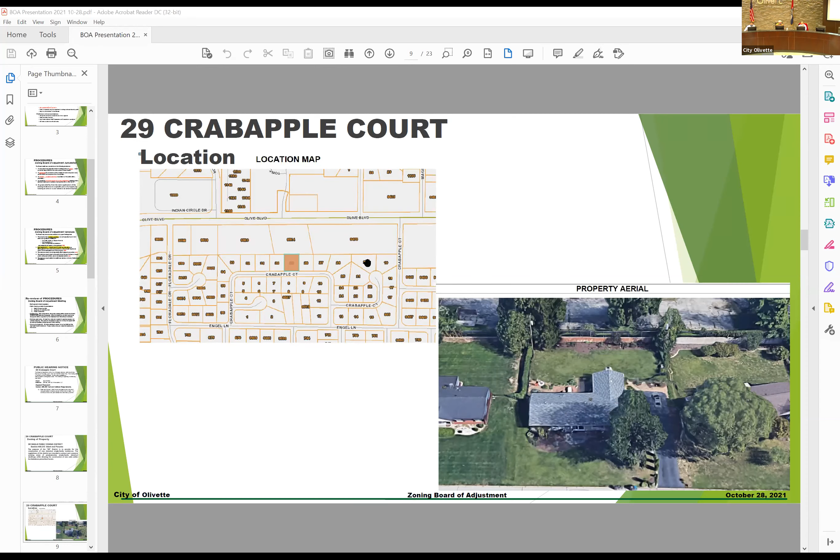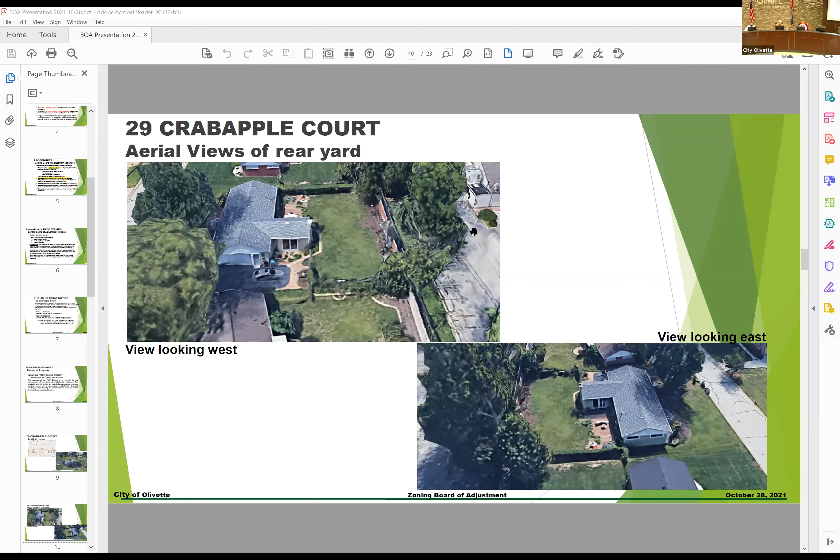Here are some aerial views of the subject property. You can see the side entry garage here viewing to the west. Viewing to the east, you can see the projection of this atrium area. The rear yard property is primarily flat. There are no unique topographical conditions illustrated either in the submitted plans or visually on the property grounds. There is a retaining wall that runs along the north lot line that is part of the residential properties off of Olive to the north of this parcel.

Again, the specific appeal request is regarding 400-260C, the yard and setback requirements, subparagraph C, which establishes rear yard setbacks. It varies because it's calculated based on a percentage, 20% of the lot depth, but in no case has the council adopted or established that it should be less than 20 feet.

So when you apply it to 29 Crabapple Court based on the plans that were submitted, the lot has a depth of 120 feet. If you calculate 120 feet times 20%, it would require a 24-foot rear yard setback.

The petitioner has submitted a proposed plan to add an additional garage to the rear of the property. You can see it here in that hash-marked area. That garage contains some additional improvements - I believe there's a vanity and a woodwork area.

This solid red line here represents the 24-foot rear yard setback marker. You can see that the addition goes further north, approximately 16 feet from the rear property line. The hash red line represents the no-less-than-20-foot marker for reference.

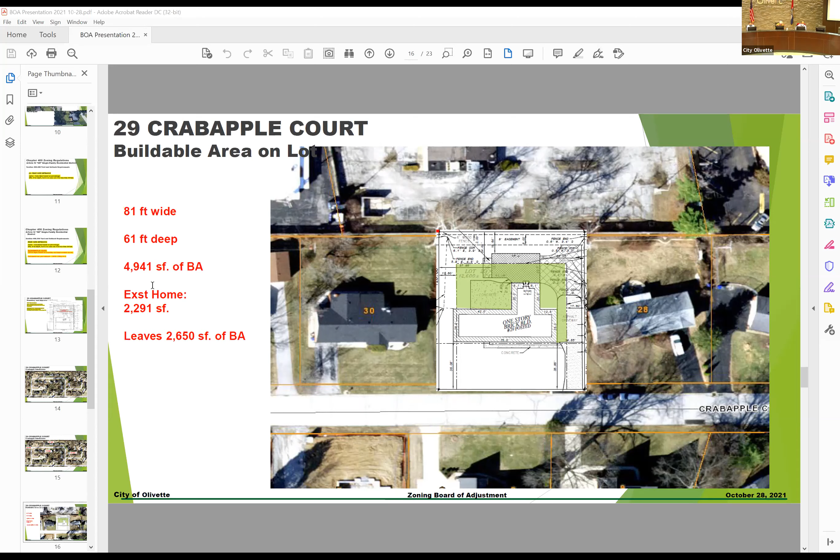This property has a buildable area that's about 81 feet wide and about 61 feet deep. What is the buildable area? That is when you take away the front yard setback, the side yard setbacks, and the rear yard setbacks. There's an area that you can build that's about 81 feet wide, 61 feet deep. So basically that's 4,941 square feet of buildable area on the property grounds. The existing home is 2,291 square feet. So there is still 2,650 square feet of buildable area to place an addition or expand this house within code.

County records indicate that this is the existing layout of the home, with A representing the main portion of the house, B the patio area, and C the existing 2-car masonry garage. It's about 525 square feet.

So given that the petition was submitted with a 16-foot rear yard setback, it was denied by staff. It does require what we call our planning and community design review, but the commission cannot review a design that is inconsistent with code, and therefore the petitioners chose to appeal and request to go before the zoning board of adjustments, requesting relief or variance from the required rear yard setback to allow a house 16.64 feet, or in addition 16.64 feet from the rear yard setback.

In this, the findings that staff will note are specific: the property is zoned SR, single family residential. The lot is legally known as Lot 29 of the Crabapple Court subdivision. The home was built in 1956. Roughly the lot was recorded around the same time. The current owner has lived in this home or residence since 1999.

This is a legal lot of record, even though the lot may not comply with the minimum SR dimensional requirements. It's a legal lot of record, and that's why the city uses a percentage to account for setbacks. It proportionally addresses the different variety of lot sizes that we have throughout our community.

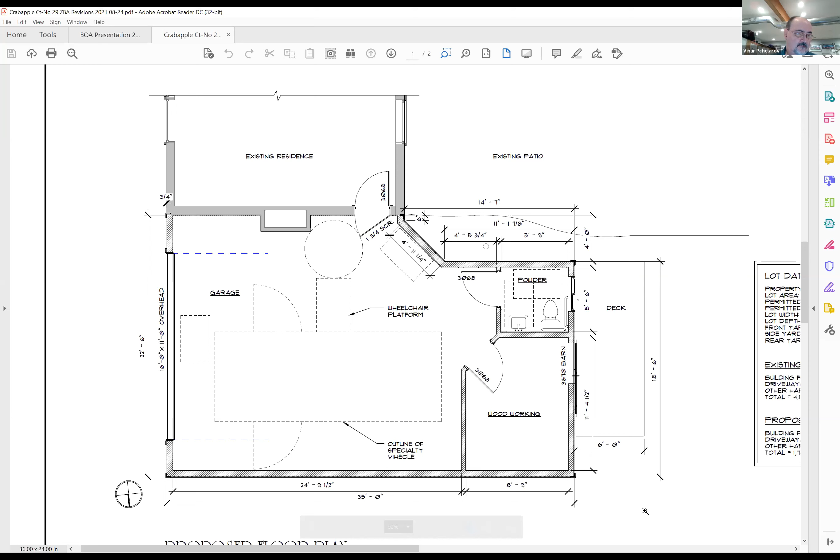Anything else? That is it from me. Any other questions for the applicant? Who wants to speak next?

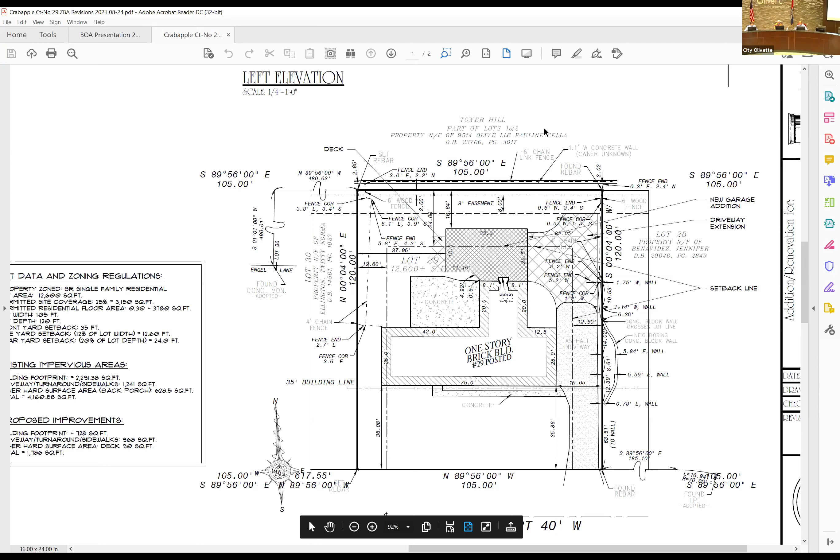Thank you. Any questions the board members have from the applicants? I have a question. The current garage, Ms. Mueller, is being used for what again? Victor is a ceramic artist, he's been one his entire life. We put heat in the garage and new lighting so that he can work and do ceramics, like pottery. He sells his work. He's a nationally known artist, and he would like to continue to produce art and have a warm, safe, comfortable environment to do so.

So the other vehicle will not be stored in a garage then? Not right now. Right now I don't have any place for my car, but we're continuing to try to figure out solutions. This was why we originally designed it to hold both vehicles, because we've transitioned the garage space for Vic's ceramic arts. So this time we'd just be parking her car in the driveway and storing the van, giving Victor access in and out of the house to the van in the new garage.

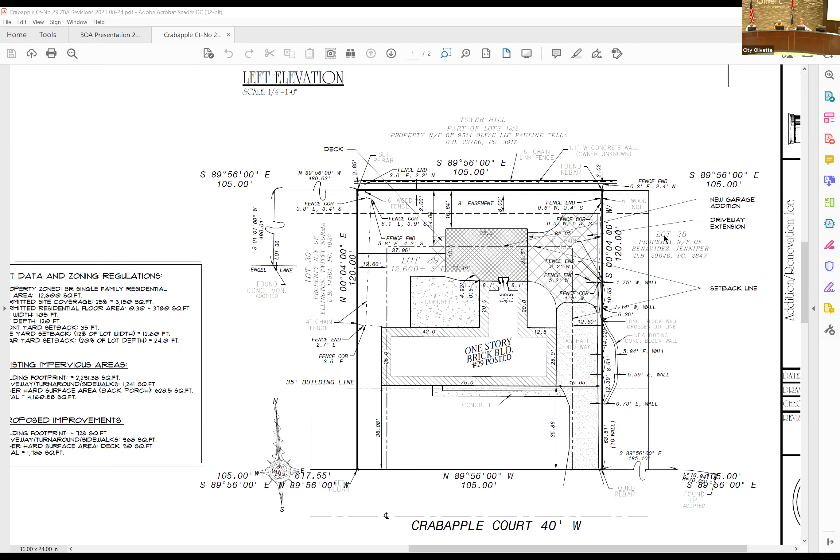I'd like to hear from all the board members what they have to say about this. I did have one question for you. You made a comment earlier about them having plenty of buildable space on the property without requiring a variance. Maybe we can bring them back and ask, can they accomplish what they need with the space they have without a variance?

That's what I'm thinking, right. That's exactly what I was thinking. Did you hear that comment?

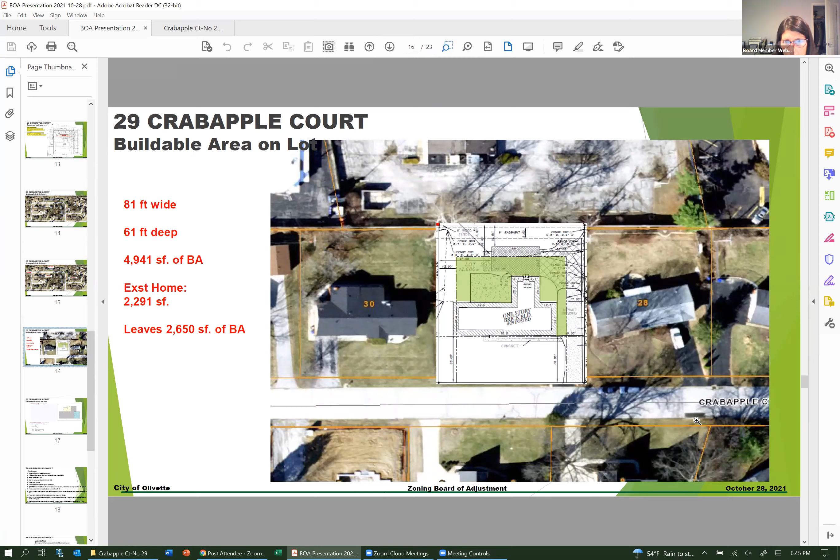No, I couldn't hear it. I'm sorry, I don't know if you heard what Larry said, but I was thinking that if they moved, on this photo here on the screen, I'm assuming everyone virtual can see it, if you move the proposed garage over to where the patio is, I don't think they would need a variance.

Also, my understanding is there's no basement. Is that correct, Carlos? That I'm not sure, I believe I can check with the county record. But I didn't see it on the county record.

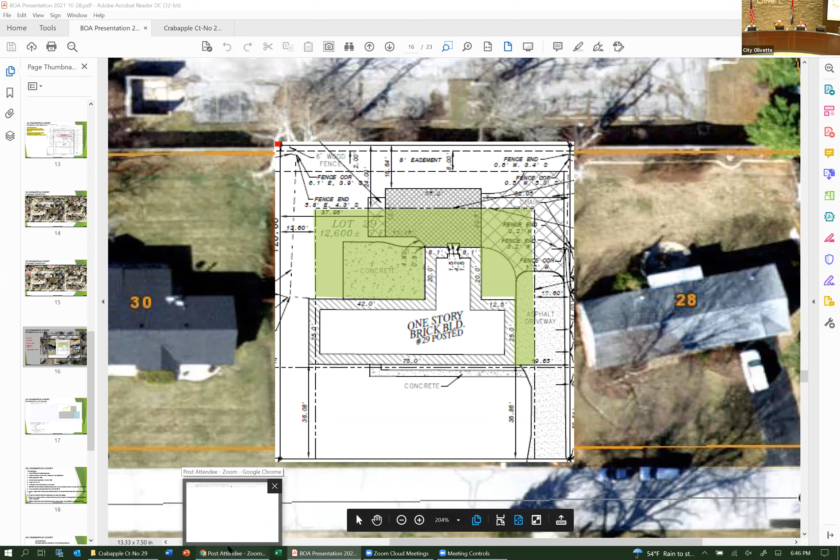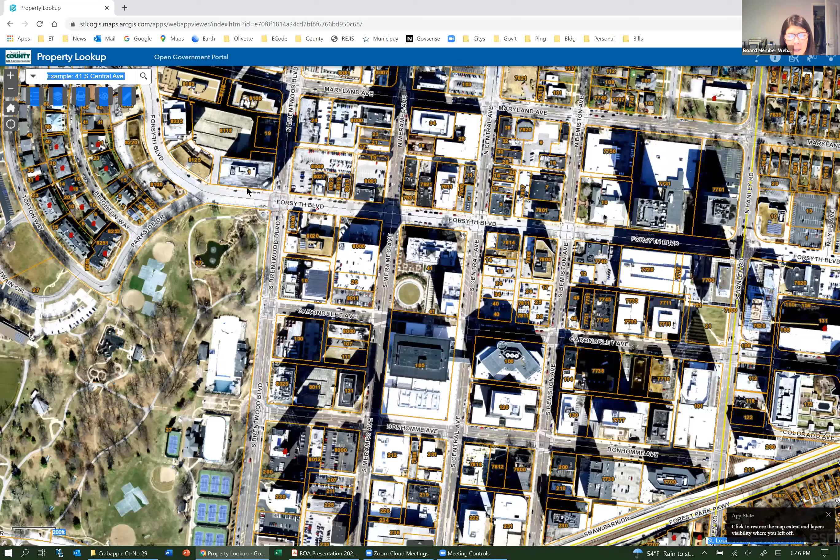When you move the garage like that, you block all their back windows. Yeah, I think it would be on the patio. Are you inferring to remove part of the patio or put the whole thing where the patio is? Well, then there's no yard. They'd have to drive around back to pull into a rear entry garage. I don't think the driveway would accommodate that to get around that back addition, it looks like a porch.

Because the van's turning radius is very wide, it would be hard. You're blocking the windows, taking away the backyard, creating a rear entry garage, and trying to navigate a huge van in a small backyard. It's kind of ruining the property into the future to do something like that. Who's gonna want to buy that? I don't think you could drive around either, and then pull in.

I'm trying to figure out why they can't move the ceramic studio inside the house and have the garage that's there actually be functional for some vehicle. Well, he said in the beginning that the garage height, I'm looking at the drawing, it's a smaller garage, and I don't think the van's quite tall enough to get through this original garage. Even if they used it, I was thinking she was gonna use that for her own car, but I realized later they're not even using it as a garage. I don't think the van could fit in that first garage.

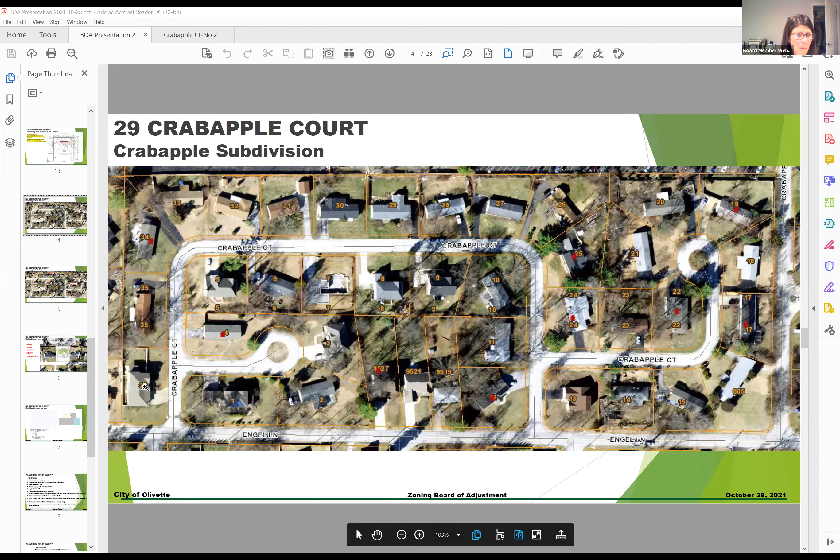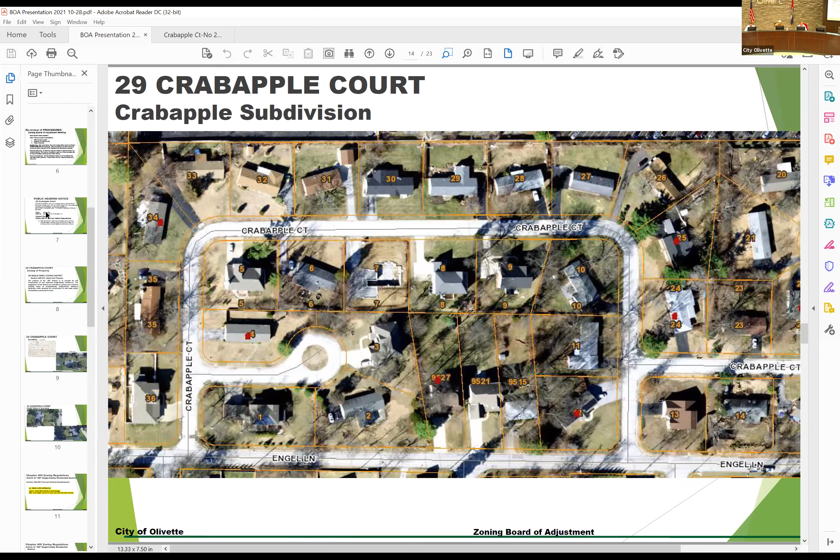Property 36, there on the lower left corner. What I'm getting hung up on again is under section 401.1650, the area variance. It states an area variance may issue to permit the building or enlargement of a structure where specific enforcement of the zoning ordinance would prohibit such construction. The Board of Adjustment may issue an area variance only upon finding that the property is unique in some way. It is narrow, but is it unique? That's why I'm hung up on the language of the variance we're looking at.

Do all properties have such a utility easement in their yard? Is that at all unique? If the question is do properties have utility easements that run through the backyard, yes, and the width and size of those easements vary depending on the utility. Those are noted well in advance when the property is purchased and recorded as part of those plats.

But could that be considered unique to a property, you know, properties varying in depth, etc.? Is it possible that having this utility easement prohibiting certain structures might make them get creative as they're proposing? That's a discussion for the board. All properties generally have easements on them, and they vary all in sizes and shapes depending on the utility provider.

Any other questions? I guess it sounds like, well, I think I have an idea, but I think seeing where it's a hardship, I wish there was something we could do, and I'd love to hear suggestions from the board to make it happen or not.

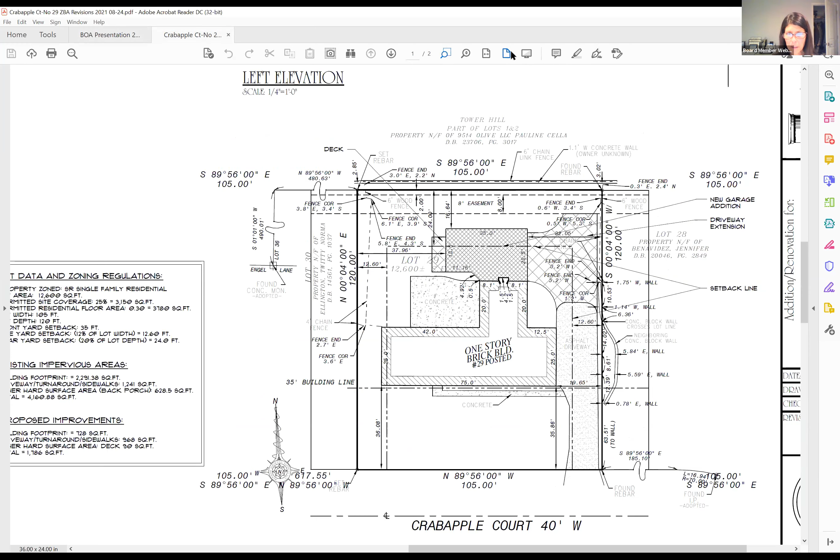I guess they could consider, can that original garage door be removed, and can they build that opening higher? I'm not sure what the roof structure entails. I don't know if that can be turned into the van garage or not. Brandon didn't go into that, whether it can or can't, or the man in the beginning, where they could just build a normal garage in the back and accommodate the width, the setback. I can't see any other option for them. I can't either, but it can be made higher. I don't know structurally, but zoning-wise, it can.

Well, they could actually just reconstruct the existing garage to fit the things they want to fit in there. You're not going to be left with a ceramic area and a woodworking area and a bathroom, but it seems to me it could work by taking the existing garage down and rebuilding it, with room in the back to build a smaller garage, or the studio, or everything else they wanted, like storage, etc.

Now, this garage is built into the house, the original one, if I'm not mistaken, right? Yeah. So, I guess we can ask them if they investigated that option.

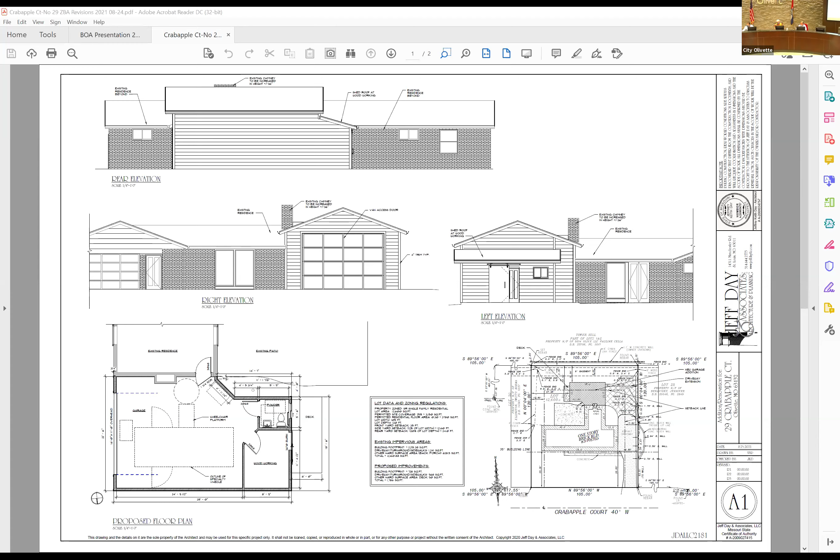Is there a motion already? Chairman, I'll note that anytime the board makes a motion, it should be in the affirmative to grant the appeal as requested. After that, any amendments can be conducted if the board wishes to do so. Those amendments are voted on individually, and then you would be voting on the motion, whether as submitted or as amended. You do need 4 votes to authorize a variance request. Again, you would be authorizing a specific property—this is to deal with a specific property, granting a waiver from that property having to meet the code criteria required for that district.

I kind of want to know where everyone's at, but I just know it is not a hardship to grant this variance, but that's up to you guys' decision.

I guess I'd put the motion forward to approve the variance. Would you read it, Adrian? Sure, let me—Mr. Hartman, I'll put it on the monitor, can't find it. One second, sir, because you didn't get a packet. One second, sir.